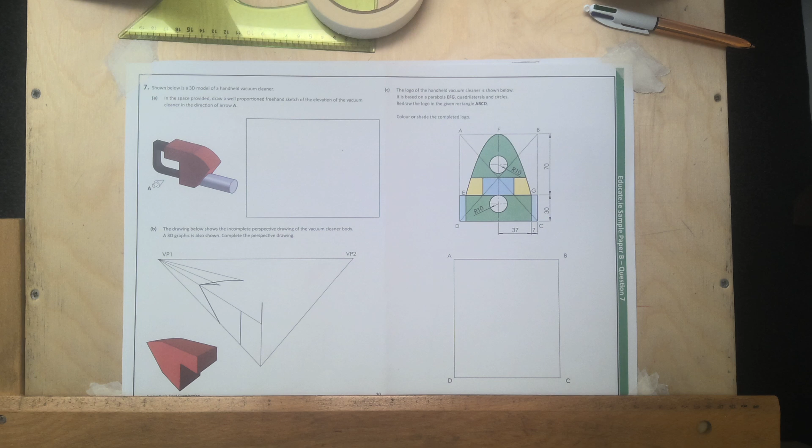Quick little video doing Educate.ie sample paper B here, question number 7. So in the space below is a 3D model of a handheld vacuum cleaner. In the space provided, draw a well-proportioned freehand sketch of the elevation of the vacuum cleaner in direction of arrow A. So they want an elevation in this direction, freehand sketch, okay?

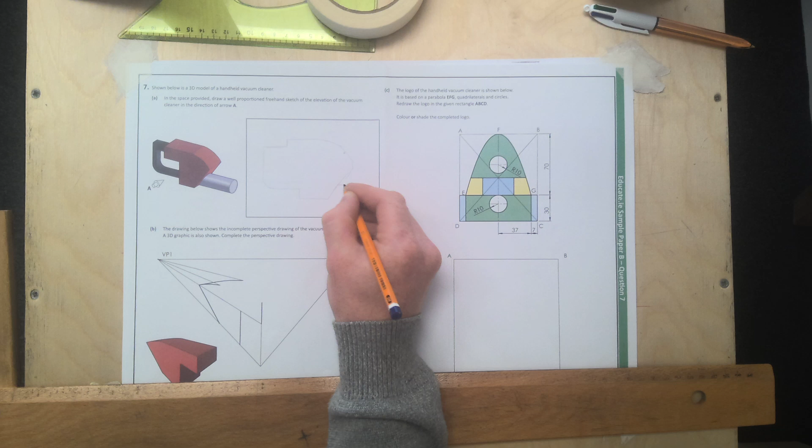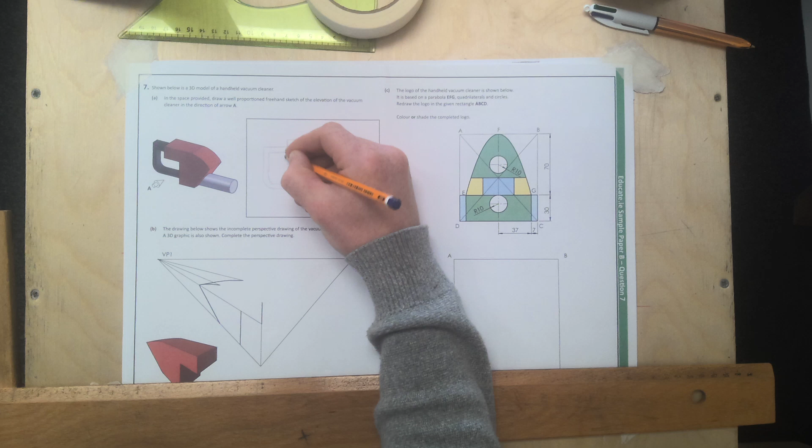So the handle part comes down, it loops around. So that's an elevation sketch there. You can color or shade that then.

The drawing below shows an incomplete perspective drawing of the vacuum cleaner's body. A 3D graphic is also shown. Complete the perspective, okay? So in these perspective questions, any line that's running back here to the left hand side goes back to VP1. Any line that's running right goes to VP2. And lines straight up remain straight up, okay?

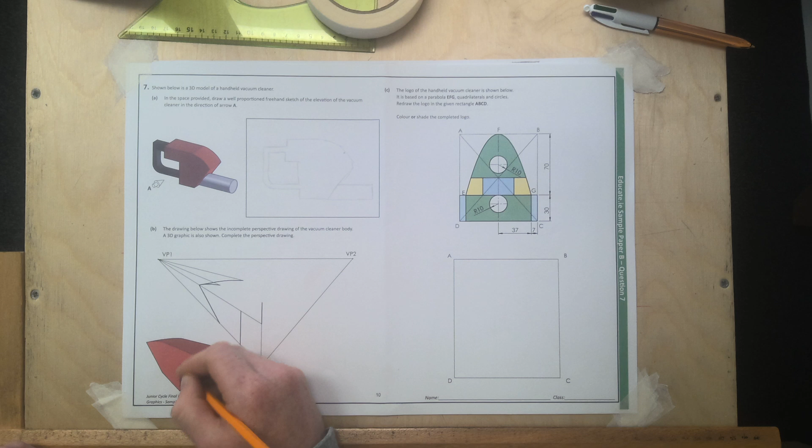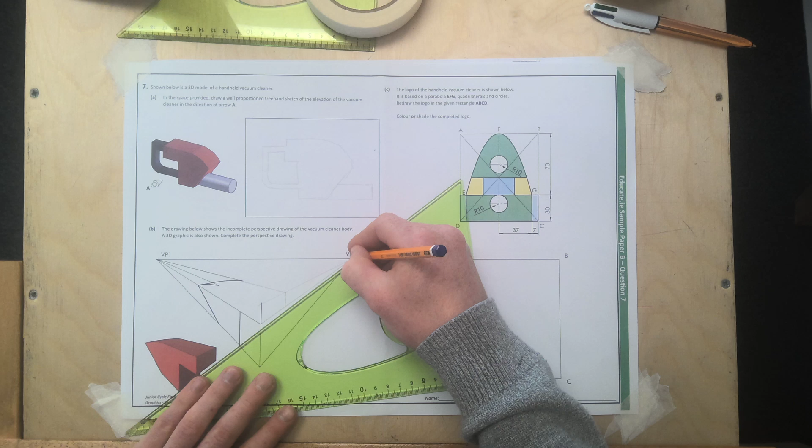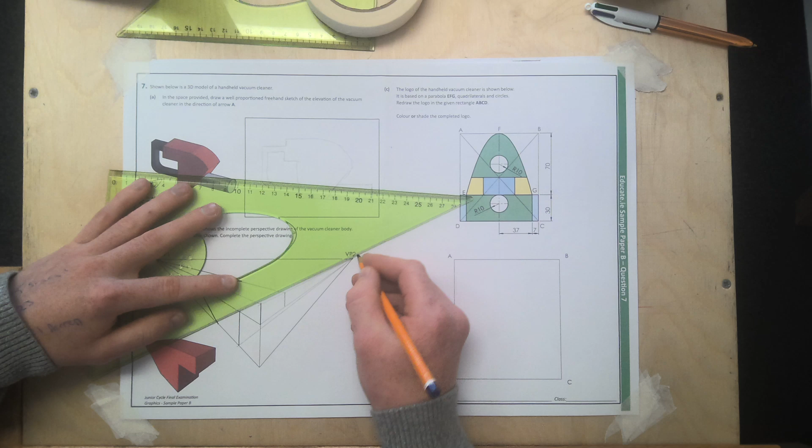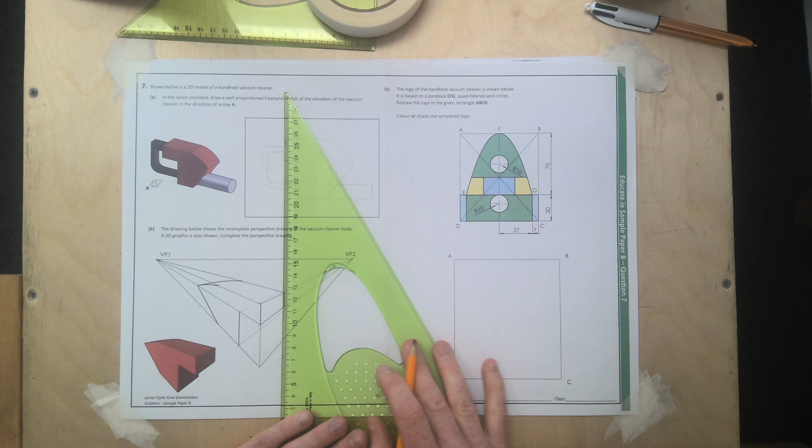So I can finish this over here. So that's after getting that little bit of the object. I have this back corner here. We can finish this forward here. That's the perspective of that completed.

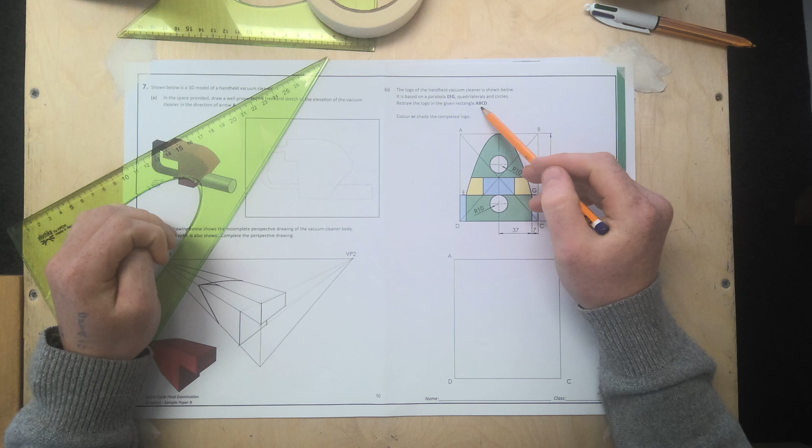Come over here then. The logo of a handheld vacuum cleaner is shown. It is based on a parabola, EFG, quadrilaterals and circles. Redraw the logo given the rectangle ABCD, color or shaded. So ABCD is given to us. Alright. First thing I'm going to do, I'm going to set up my box and I'm going to draw in that parabola. Okay, it tells me it's 30 millimeters up from this bottom line here.

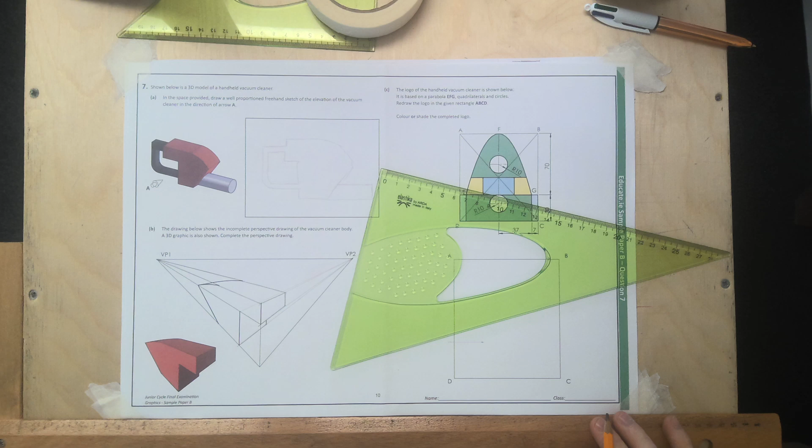30 millimeters up from the bottom line. It's 44 in for the center. That's my center line. And it's 7 each side up here then, so it's 7, 5, 6, 7 there. 7 there. So that's my box drawn there basically, right?

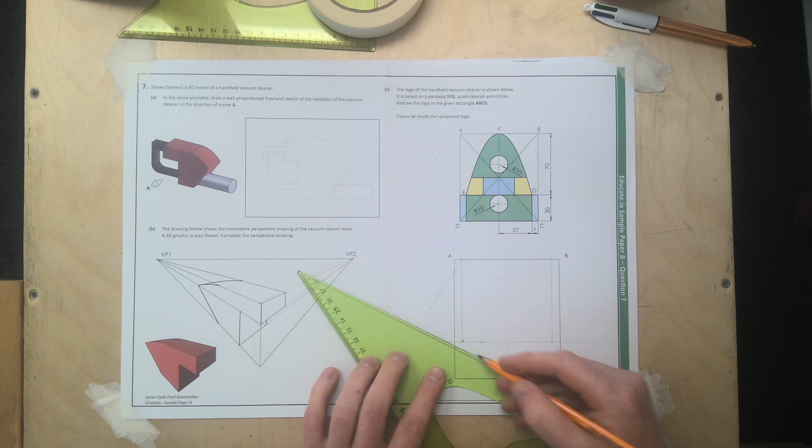So when we're drawing a parabola, draw a line out here at any angle from this corner, any length, any angle, and we do the same down in this bottom corner here. We step off an equal number of parts. I'm going to step off 3 parts. 1, 2, 3, and the same up here in this corner. 1, 2, 3.

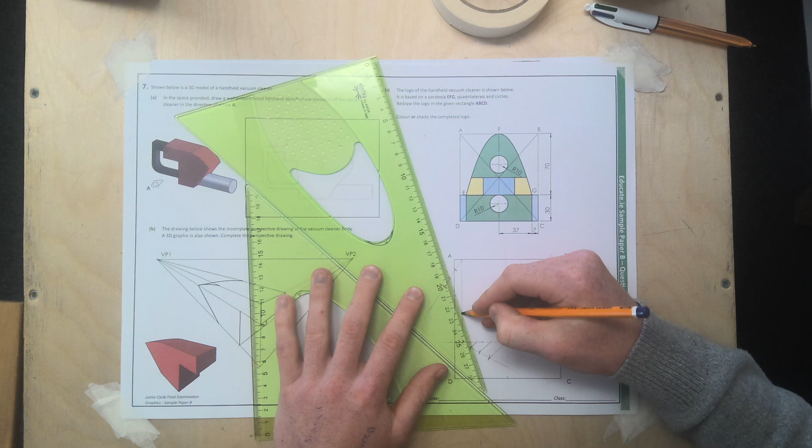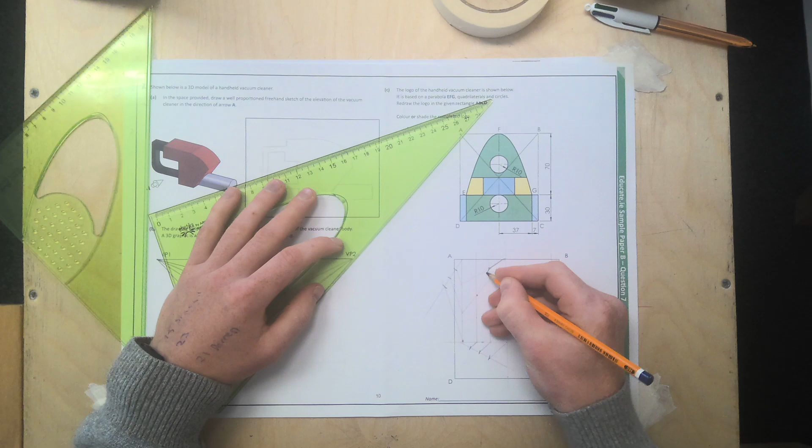This bottom corner gets lined up with the center line. And we use sliding set squares. And it's the exact same up here at the side. So this bottom corner, and then we use sliding set squares. The lines along the bottom go straight up. And the lines on the side go up to our vertex, up to F in this case. We match the corresponding points. That's one side of it drawn.

And all we have to do then is bring across our points and get our distances from the center to the point and mirror it across then. Remember, this just speeds it up a little bit. Rather than having to redraw all of what we've drawn on the left hand side on the right side, we can just go like that. And that's my parabola drawn.

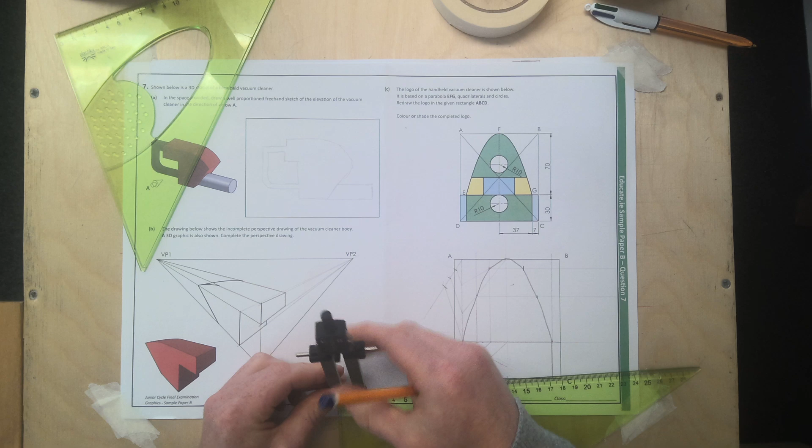Okay? Second bit here then, just going to darken in this here. Straight down. Straight down. The radius 10 is touching here, so I can set 10 on my compass. Put the point here, swing it down along that center line. That gives me the radius 10.

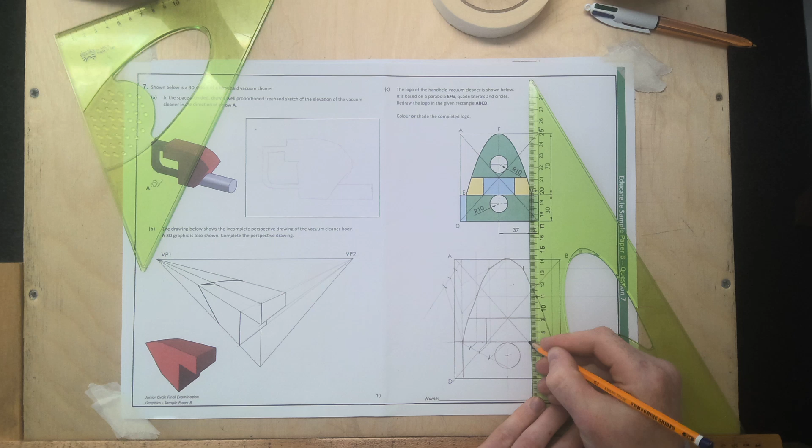Now I have to draw this part here and the circle up here. So I'm going to have to join my diagonals. Right? This bit here is easily found. So where the diagonals cross here in the center, I go straight across. That's where the diagonal hits this line here, I can go straight up. Same on the opposite side there. So all I've left to draw now is this circle, right?

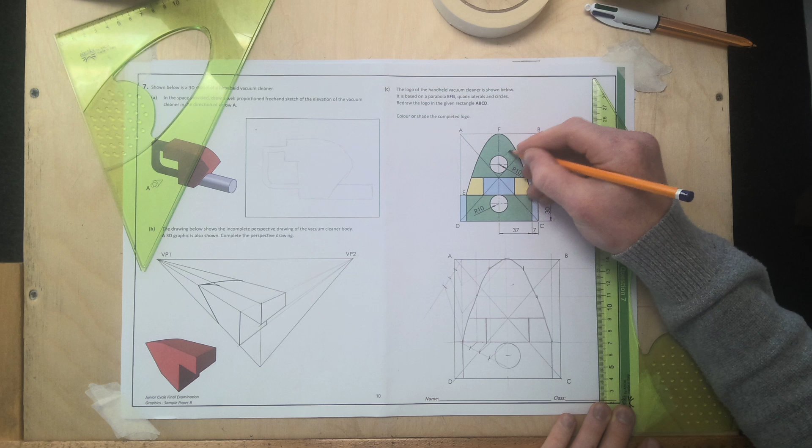So anywhere from the center to any point on that circle is going to be 10 millimeters. So if I draw a line that's parallel to this diagonal, 10 millimeters away, it's going to be running through the center. Same with this one here, and that will give us the center of the circle. So I'm going to measure 10 millimeters in from this diagonal, 10 millimeters in from this diagonal, and I'm going to go parallel to those diagonal lines.

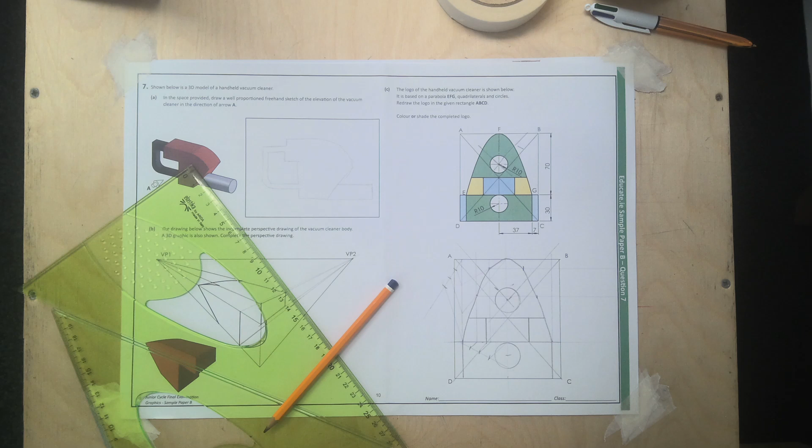Okay? I'm going parallel on this side here first. Then I go parallel to this diagonal. And where they meet there, if I set my compass to 10 millimeters, it should just touch those two diagonals, like so. So that's how we finish that question. You can color or shade that in then as well to get the full marks.